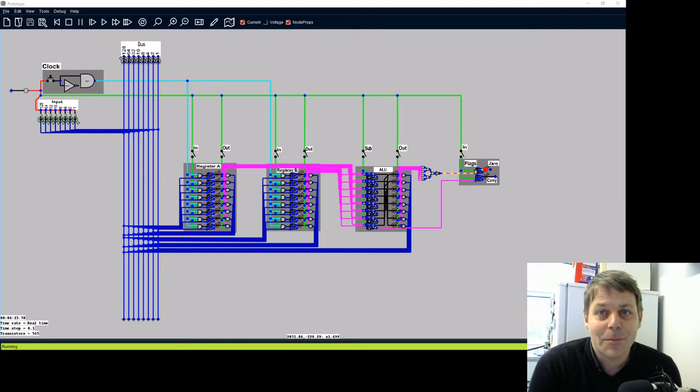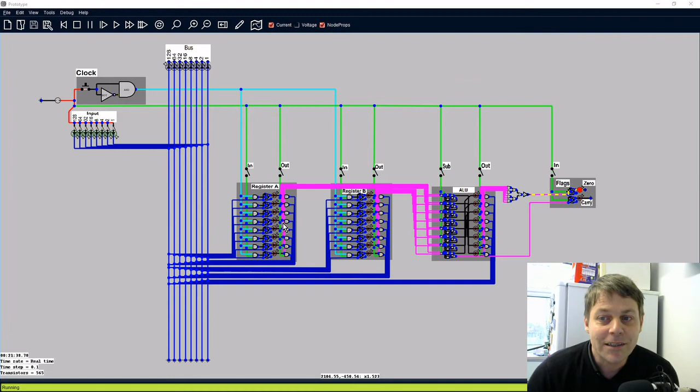So I've extended the model of the CPU and added an ALU. I've also added another register, so we have register A and register B. The outputs of the registers are taken directly into the inputs of the ALU.

I made a bit of a rookie mistake when designing the ALU in that I made the least significant bit at the top of the ALU, whereas in the registers the least significant bit is at the bottom. So just so that the LEDs are in the same order, this mess here is just crossing over the lines, so the least significant bit is this adder here at the top of the ALU, but that is feeding into the LED at the bottom of the ALU. So the LEDs in the ALU and in the registers are in the same order.

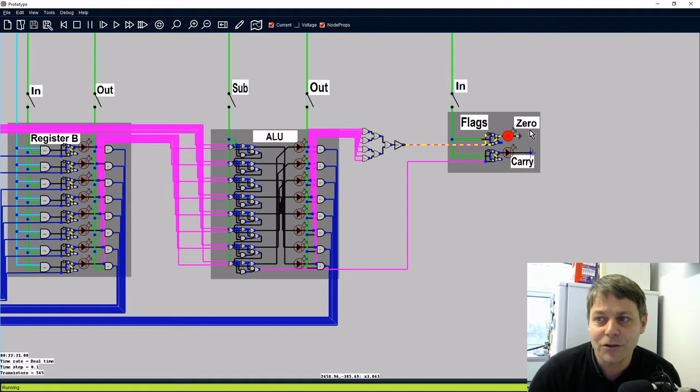I've also added a flags register to the ALU, so we've got two more flip-flops which work in the same way as they do in the registers. We have an input switch, and then we have two flags, one for 0 and one for carry.

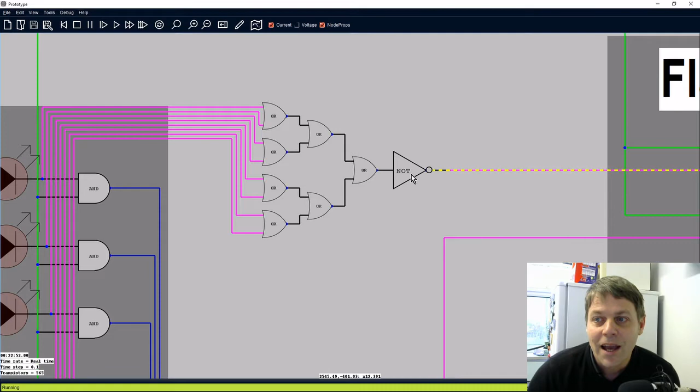All of the ALU's outputs are fed into a series of OR gates, and if any of them are switched on, that will feed a 1 into this NOT gate, which will be 0 if any of the switches are on. If none of the switches are on, then it means the result of the ALU's calculation is 0, and that's feeding into the 0 bit of the flags register. So if we switch the flags register on and the ALU performs a calculation where the result is 0, the 0 bit will be set.

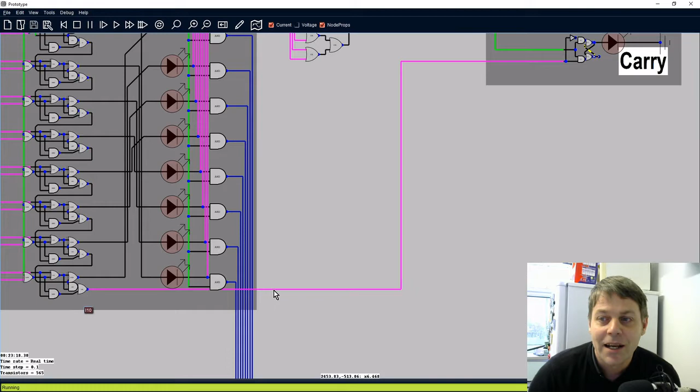The carry out of the most significant adder in the ALU is connected to the carry bit. So if we perform a calculation where we're carrying out of the 8th bit of the ALU, then the carry out will be set. So we'll be able to check if we've overloaded the ALU by asking for a value which is too big for it to calculate.

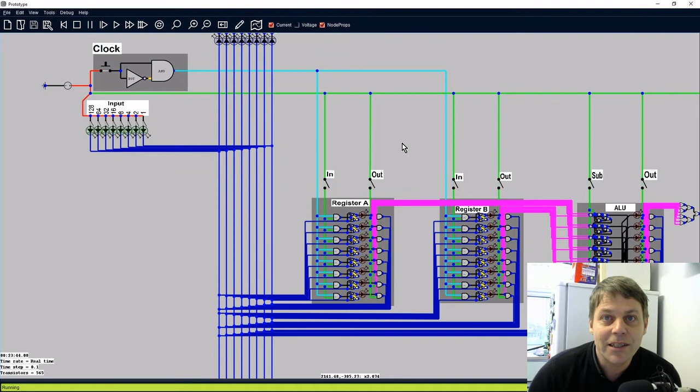So let's test the ALU. We'll put the value 15 into register A and the value 5 into register B, and we'll see if we can add and subtract them. So we put the value 15 on the bus. That's 8, 4, 2 and 1. We switch on the input to register A and fire a clock pulse. We load 15 into register A.

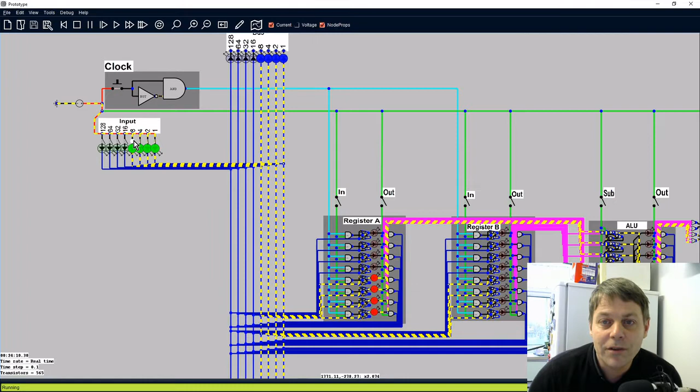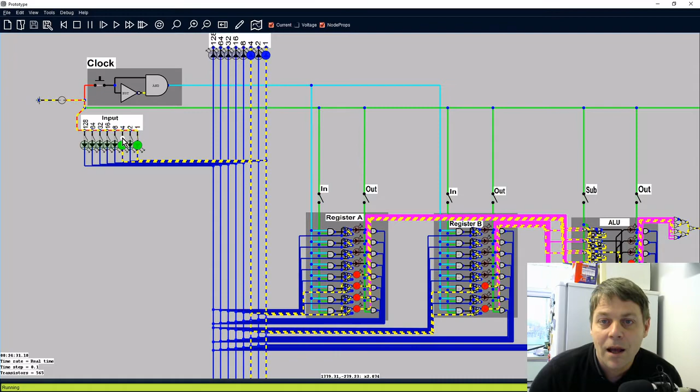Then let's put the value 5 on the bus, so that's 4 plus 1. So we'll switch 8 and 2 off. And we'll load that into register B by switching on the input to register B and firing a clock pulse. Switch off the register B input and switch off the input to the bus.

Now we can see the ALU has the value 10100. If I switch on the output of the ALU, that will output that value back onto the bus, and we can check to see what's on the bus. 16 plus 4, which is 20. So that's what we want, 15 plus 5.

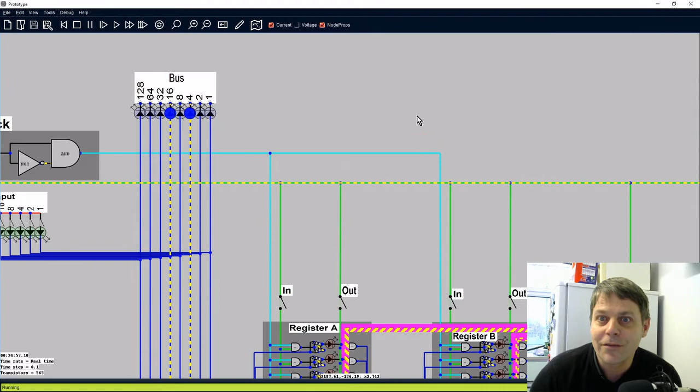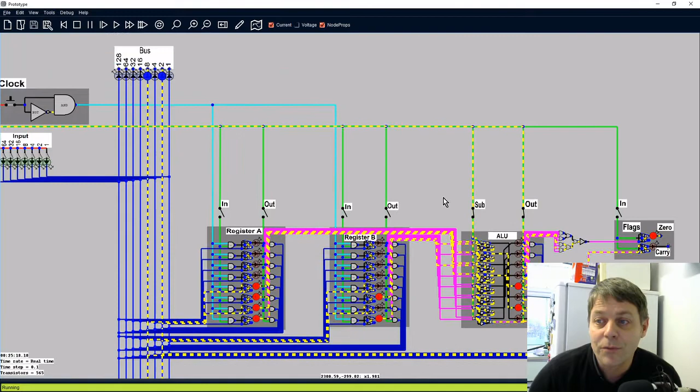If we switch on the subtract bit to the ALU, it should now switch the ALU's second input to the 2's complement value of what's in register B, so that should now subtract 5 from 15. So with the subtract bit on and the output of the ALU going onto the bus, we can see we've got 8 and 2, which is 10 on the bus. So the ALU seems to be working.

So now I'm going to test the flags register. So I'll switch the flags register input on. We can see that currently the ALU has 0 in it, and the 0 bit is set in the flags register. If we load the value, let's say 129, into register A, register A now has 129 and register B has 0. So the ALU has 129 and the 0 bit is switched off because the ALU has a value.

Now if we load 129 into register B, the ALU will add 129 to 129. That's too big a number to store in an 8-bit byte. So the ALU has now overflowed. The carry out of the most significant bit is set, and so the carry bit in the flags register is set. So that's the flags register.

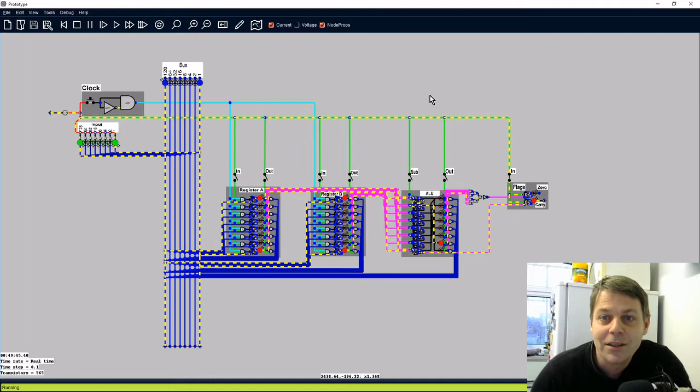So let's take a look at something we can do with our CPU model already. We'll count up in fives. So we'll load the number 5 into register B. Switch on the input to register B and fire a clock pulse to load the value from the bus. The ALU is adding the value in register A to register B, so that's 0 plus 5 equals 5.

Let's put the ALU out on the bus. So now the bus contains the value 5. If we switch on the input to register A, so that register A should load the value from the bus, and send a clock pulse, register A will load 5, register B will stay at 5, and the ALU will then add 5 and 5 and output 10 onto the bus. So let's send the clock pulse.

We fire another clock pulse. We've got 16 plus 4 is 20. Another clock pulse. 16, 8 and 1 is 25. So each time we send a clock pulse, we're adding 5 and putting that value back onto the bus. So that's something we can do with the CPU model already.

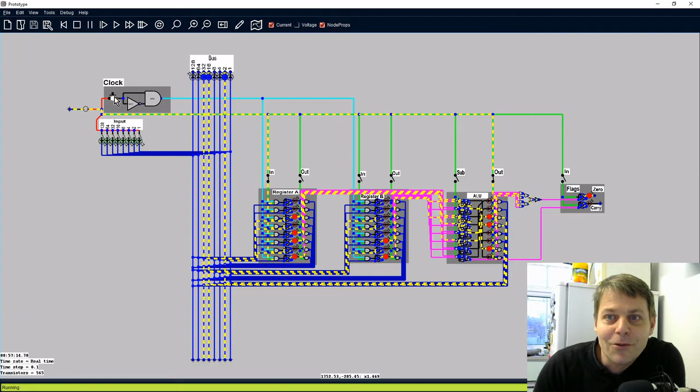So in this playlist of videos, I'm going to continue developing this CPU model so that I'll demonstrate all of the major functions of a CPU at this very low level, so you can see how computers work from the ground up.